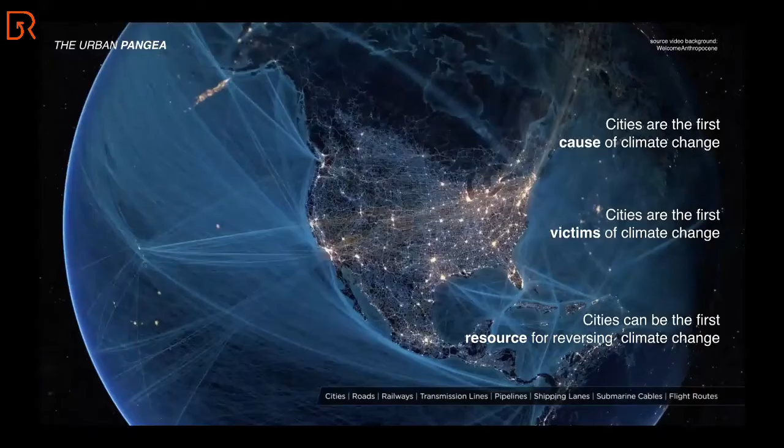I'd love to talk about what we are doing in order to promote urban forestation, urban forestry all over the world.

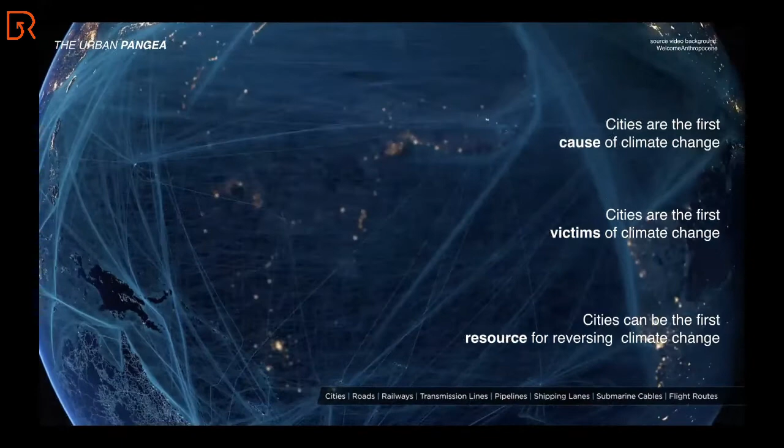Basically, the issue is to try to transform cities from the first reason of global warming and climate change, and at the same time the first victims, thanks to flooding processes, to protagonists of a campaign to slow down and tackle climate change.

And to do that, I think that green forest plans are the most strong, efficient, inclusive, and least expensive way to try to do that.

We cannot forget that we can do what we can in order to avoid producing new CO2. But if we talk about how to absorb CO2 already existent in the atmosphere of our planet, basically we only have plants and trees. So what we can do in order to multiply the number of forests and woodlands, and urban green surfaces in urban environments, is extremely efficient.

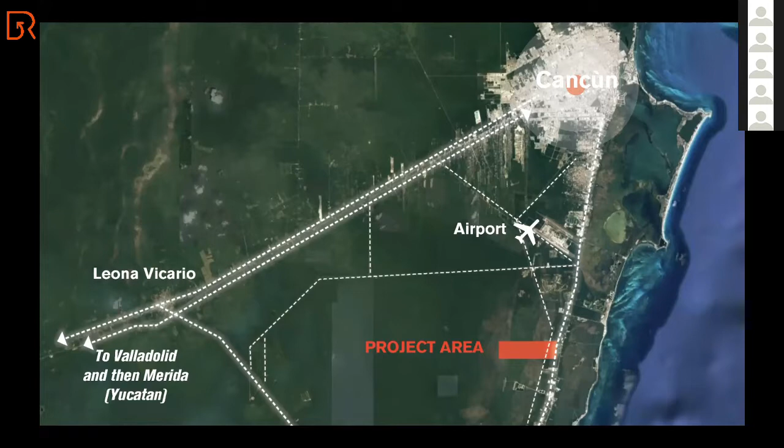I'd love now to go a little closer to some projects we're developing, where the concept of urban forestation, urban forest, is connected with the idea of a circular economy.

The first one is in southeast Mexico. This is Cancun, nearby Cancun, where we've been asked to realize a forest city, a smart forest city, in an area not so far from the Cancun airport, where a Chinese company was planning to build a huge mall.

They had already destroyed part of the mangrove forest, and we were asked to imagine something different. The developer finally came to our proposal and suggestion to realize a kind of new forest city.

Basically, this is a city for 130,000 people, with five or six epicenters around a series of university departments.

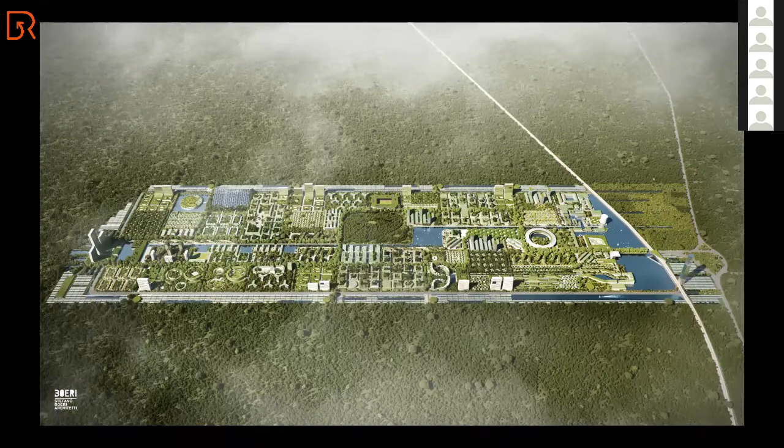This idea is to have a city composed of more than 7 million trees and thousands of other plants. But what I think is interesting in this project is this.

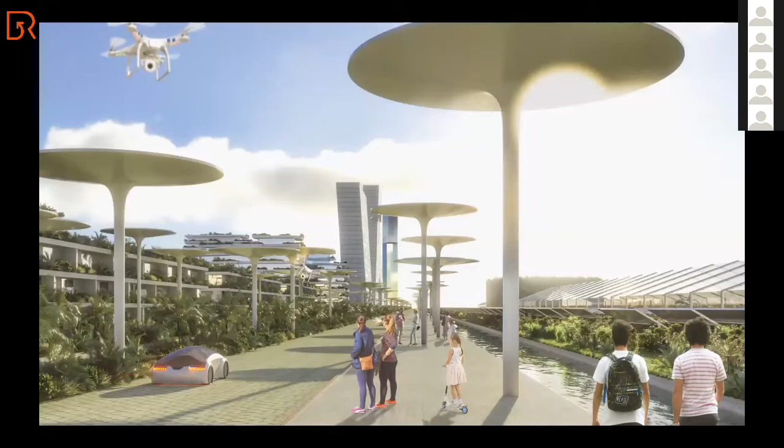The buffer, the perimeter of this new city, is composed of solar panels and places for agricultural fields, where we can imagine cultivating part of the food requested by citizens, and where we can imagine how to transform agricultural products into food.

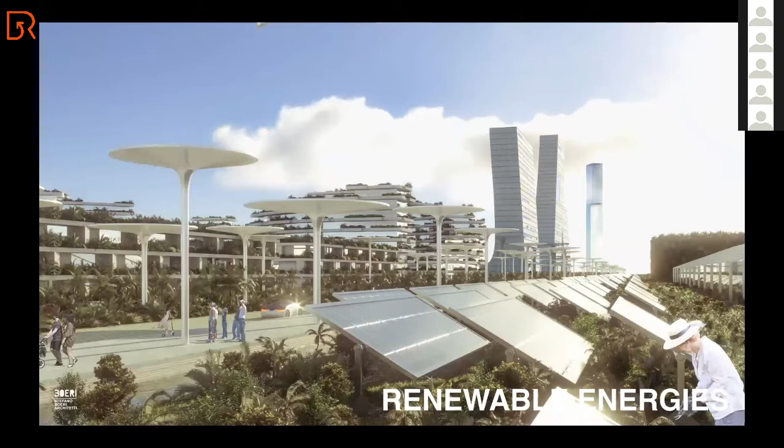So we have worked a lot on this idea of self-sufficiency. It's not only about sustainability, it's another step, which is self-sufficiency.

We were working with Transsolar, which is a German agency for sustainability and self-sufficiency, and we have them as a partner in many of our projects.

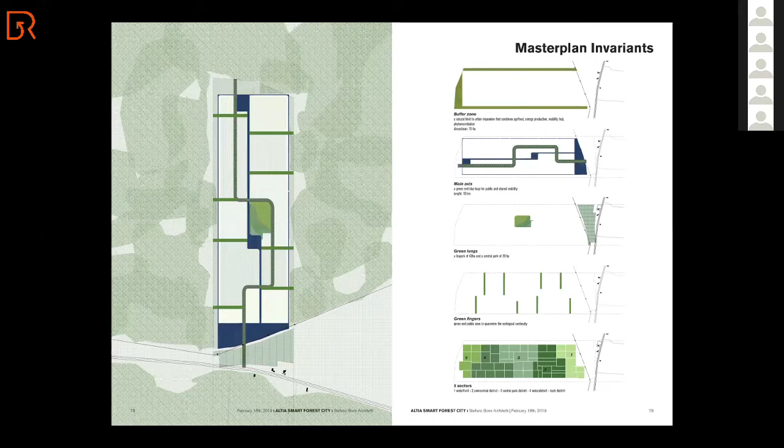You see here something about the master plan and the idea that this city is not simply green, not simply forest, not simply sustainable, not simply self-sufficient, but also has a very particular layout which helps put citizens in a condition to have all they need within 15 to 20 minutes walking time.

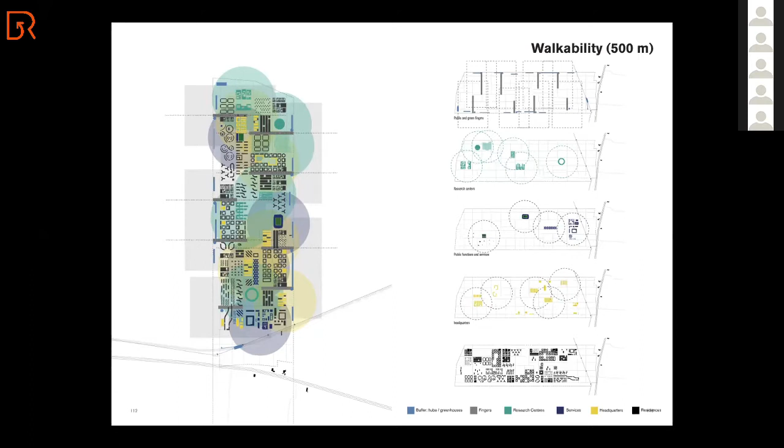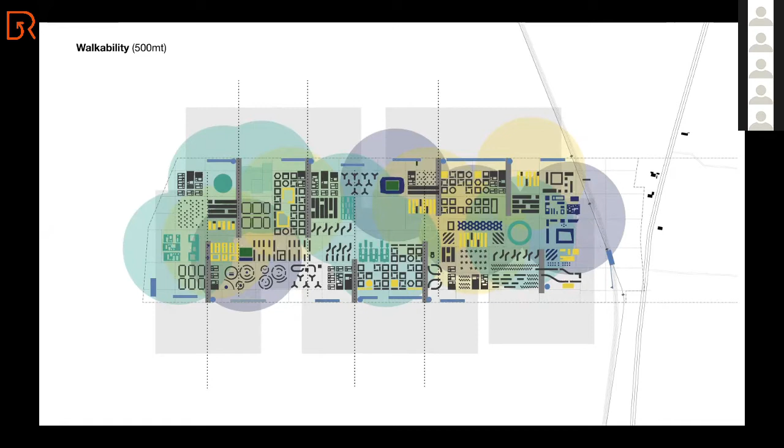I think this is a new horizon in what we can do in the future of the city, and I believe it's a metaphor of what we should do everywhere to transform our urban environment into archipelagos of districts, of urban villages, if you prefer the term.

So this is how you see some versions of the city we have developed, the relation with the greener surfaces and environments, and how water is important.

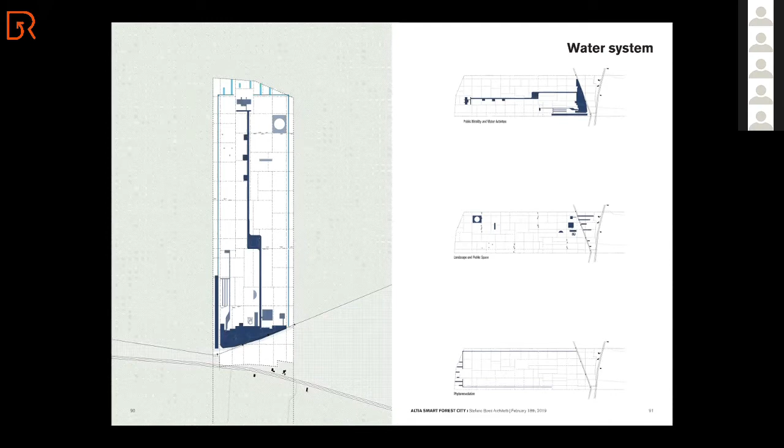We are not right on the sea, so the process of desalinization is also very important, in order to use the water not simply for irrigation of the green surfaces, but also as potable water.

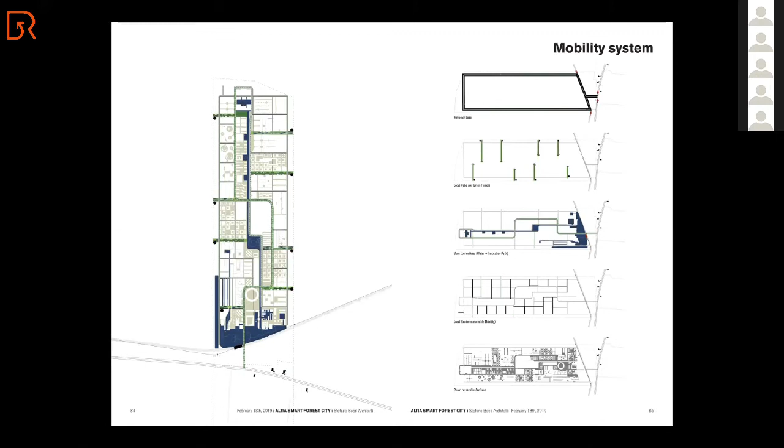And that's about the mobility, which has the same criteria. The buffer around is for private mobility, and when you enter, it's all about electric mobility and a public transportation system. And here you see a diagram of the master plan of this project.

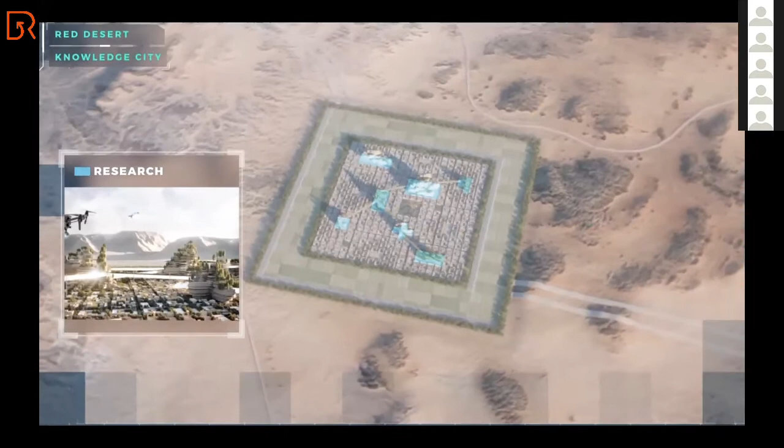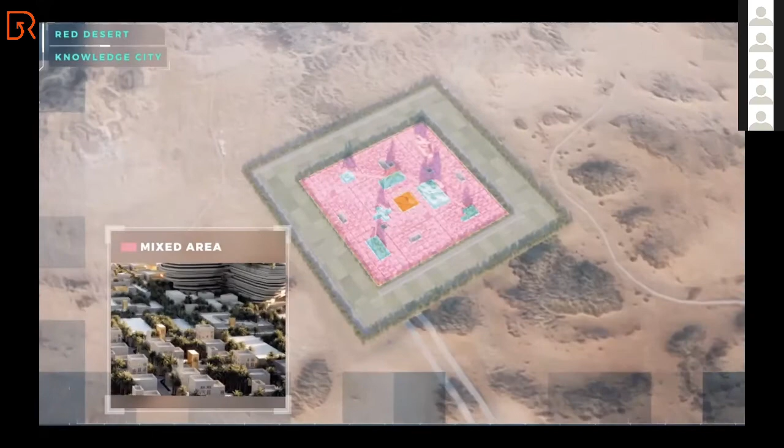We are developing another project between Egypt and Saudi Arabia, a new city with the same concept but in the desert. The idea is to have a city surrounded by a perimeter, a buffer of solar panels and agricultural fields. This concept of self-sufficiency is stressed in order to make the city work in such a complicated and difficult climate like the desert, but with the same concept of self-sufficiency. The city is also basically green, with buildings of different sizes and functions, but all covered by plants, not simply on the roofs but everywhere. Imagine how to shadow the public ground - it's a very important concern about how to reduce the heat in this specific case.

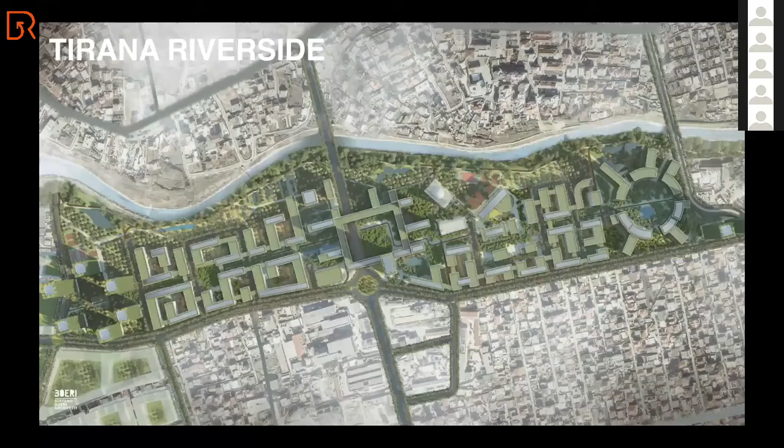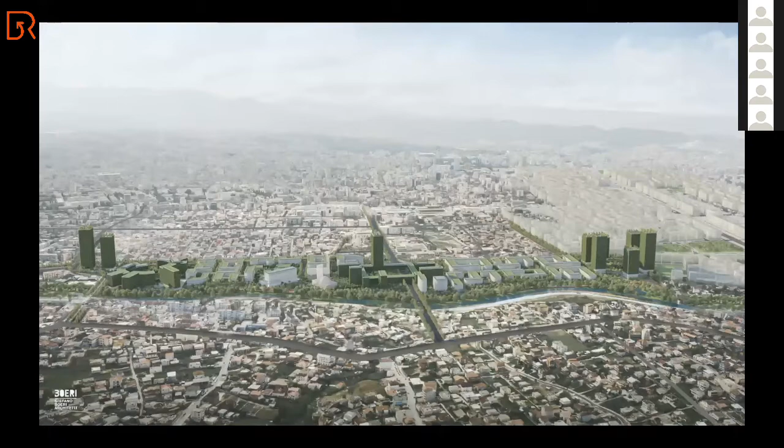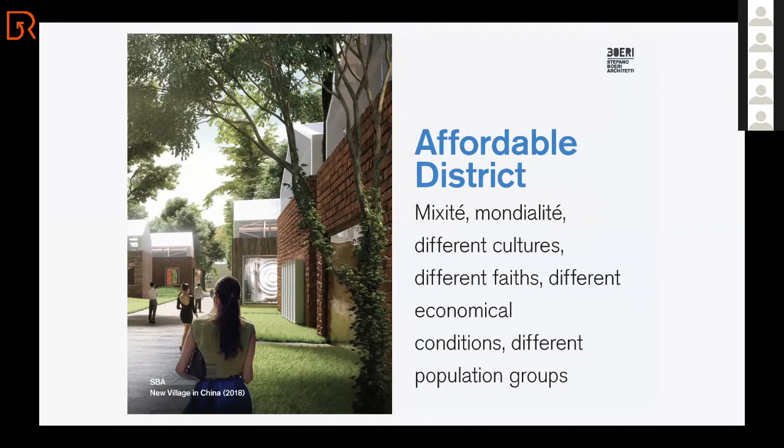Just to conclude, this is a project under construction in northern Tirana, after the earthquake. It's a district where the buildings are green, also in this case. What's important is that it's a district so strongly connected with the idea of self-sufficiency, but also with the idea of making this part of the city affordable for everybody. The same concept is translated into a very clear layout. You see how these three parts of this 15,000-people district are composed to make everybody able to reach all the functions and utilities needed in daily life, not simply commercial activities, but also schools, health systems, and cultural activities within a daily cycle of no more than 15, 20 minutes.

To conclude, this is where we are introducing, as in the other two examples, some consideration about post-pandemic conditions. It's not simply about what to do in the interiors, where we are working with the idea of having larger outer space like terraces, balconies, loggias. It's also very important to study how we can change the nature of the public ground around the buildings, and working on the roofs.

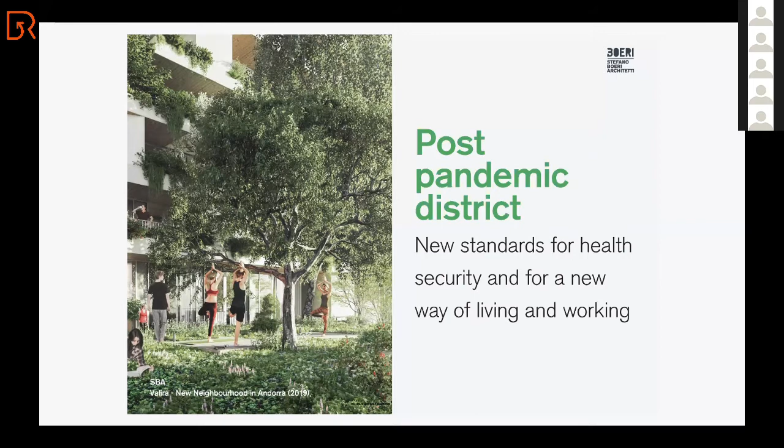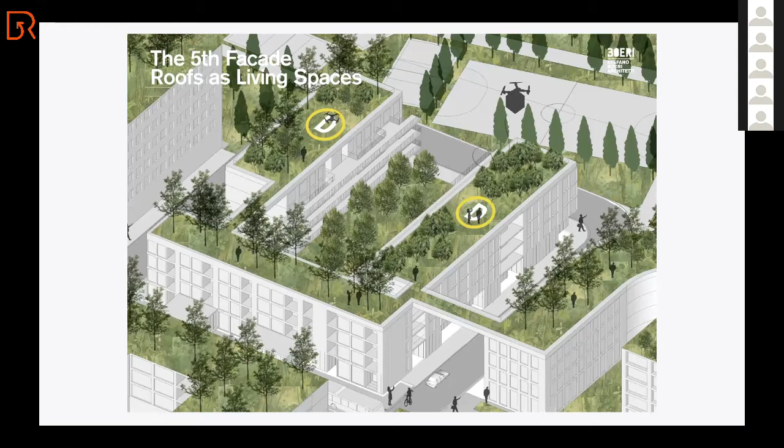So we are working a lot on the roofs. We believe roofs will become what courtyards were in the past. What we are doing all over the world is about roofs. We're working seriously because roofs are semi-private, semi-public spaces where people could meet, work, co-work, cultivate things. It's such an important space that has been forgotten by the last three to four decades of worldwide architecture. That's basically what we do, always with the idea that public schools could become, in all our projects, an epicenter of public life.

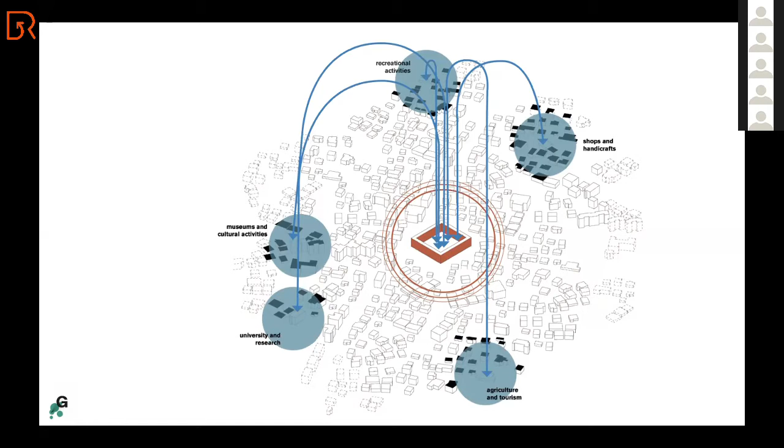We believe that schools are the core, the heart of the future of cities, that public schools could be and should be open 24 hours a day, 365 days a year, for all ages. That's our proposal, and this is an idea of what we are doing in that.

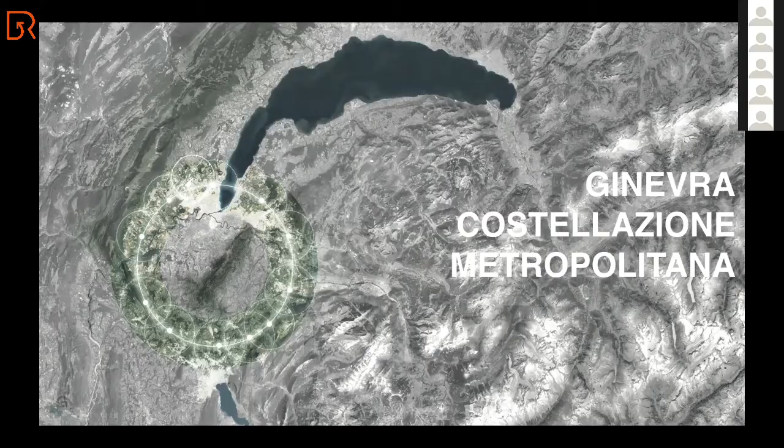Last thing, very short. It's a project for Grand Genève, and in this idea we are planning to imagine a new metropolitan layout, putting together Genève, Switzerland, and Annecy, France, with a circular metropolitan environment composed of new villages and existing villages. But what makes this project important for me is that not simply are we surrounding this new metropolitan constellation with a circle of forest, but at the center we have a mountain. The Salève is a mountain - it's not a building, not a monument, not a square, it's a mountain with its biodiversity. This, for me, is the future of metropolitan environments.

Thank you so much for your attention.

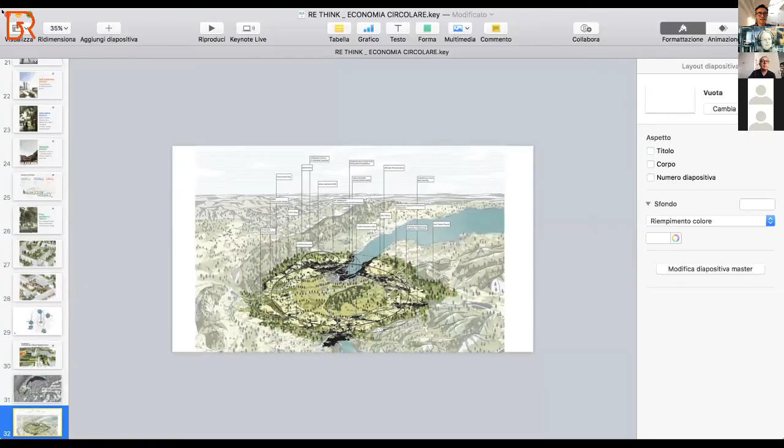Celia? Yes, I'm here. Thank you very much, Mr. Boeri. I would like to ask you, what does technology have to do with these projects? Because I think new networks, 5G connections, will be important in post-pandemic cities, as you said. Regardless of the country, what do you think about technology in the cities of the post-pandemic era?

I already told you, it's important, it's for sure necessary to use technologies, but not simply in one direction. There is a necessity to improve technology related to digital connection and immaterial connection. It's important to develop technology in order to make the city self-sufficient in terms of renewable energies. It's important to implement technologies connected with transformation of every building into an energetic plant that can absorb energy and distribute it all around. So technology is simply one component of the future.